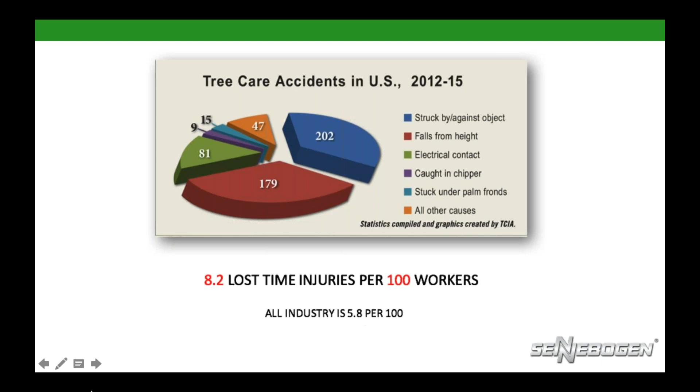I'd like to move along, and in the next slide you'll see that we also have a big problem in the tree care industry with fatalities.

It's hard to say what caused them to make that sort of decision, but there are so many variables in tree work. Every tree is at least a little bit different. You could even argue that every cut is a little bit different. And that means the variables are around us all day, every day. We've got to be able to think on our feet all day. The opportunity for operator error is just all around us all the time. And now we're in a time of more distractions, perhaps, than ever before.

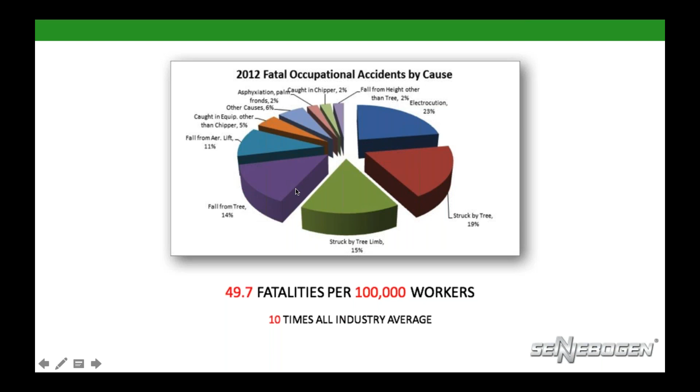This tool that we know of as the chainsaw has been both a blessing and a curse. The top handle saw in particular, because it positions both hands over the center of mass for ergonomic reasons, it also puts the operator into a constant temptation to work with one hand. Why? Because you can. It was never intended to be a one-handed operation, but because you can, that can free up the other hand to hold the branch. And this is unfortunately for several decades now, the way people have been, I'm not going to use the word trained, they've been shown how to do tree work. The longer they do this, the more they do it, the more they're training themselves to work this way. And this is the result.

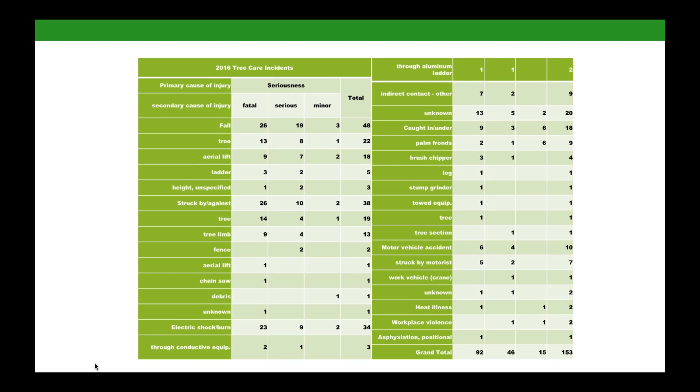But I believe we need a new approach. If we're really going to reduce injuries and reduce fatalities, we need a game changer. And the game changer that's before us right now, and the future is here. Just like in the forestry industry, the traditional forest and logging industry, automation and technical machinery was developed to harvest trees by people working in a much safer environment, eliminating fall hazards, eliminating struck-by hazards, putting people, for many intents and purposes, into a Faraday cage, removing them from that danger. That is what has made a difference in that industry.

The future is now. It's here. I'm excited about this technology because I want to make a difference in the dismal injury and fatality rate in the industry that I know and love so much.

Thanks a lot, Ken. I would like to take the opportunity to introduce to you the SENNEBOGEN 718, as well as go through a couple of details and use a lot of pictures to show you what we did and what were the basis of our design and the ideas behind our design.

As we get into this area, the 718 was engineered based on over 65 years of experience that SENNEBOGEN has building material handlers and cranes. And we combined that experience with a very deep analysis of the tree care industry requirements and how we could make changes to this industry.

First of all, we look into safety. We look into trying to remove the person from the cutting area on the trees as much as we can, in as many situations as we can, and position this person inside a protected environment inside the operator's cab.

The second criteria was performance. It's well known to all of us today that it's getting more and more difficult to find people to perform this work. So how could we mechanize this work and increase drastically the number of trees that can be processed per hour or per day using just one operator?

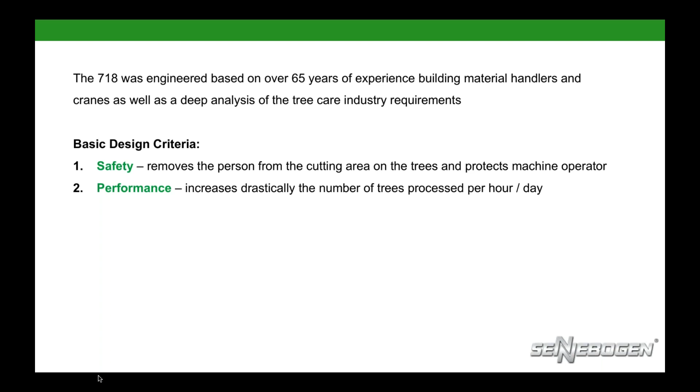As a third criteria, we look into operating costs. And we look into how can we build equipment that's very simple to maintain, that's very robust, that can reduce drastically the operating cost as well as the maintenance cost.

And last but not least, we look into flexibility. We know the industry and we know that most of the companies are not cutting trees every day, but they have other tasks that they have to perform. So our idea when designing the 718 was to provide a tool carrier that can operate multiple attachments, being a grapple saw, being a tree processor, being a mulcher, being a mower, without having to make any change to the base unit. Meaning just changing the attachment at the end of the stick, we could perform the different functions.

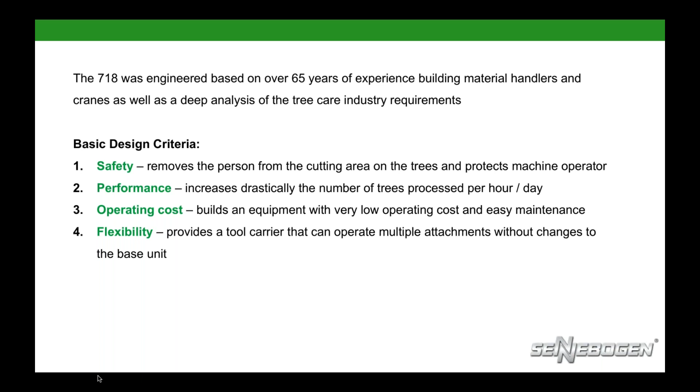Moving forward, I would like to get a little bit into the basic operating data without boring you with 1,000 numbers and figures. Everybody can read that in a catalog. But the important design criteria was, first of all, the lift capacity. When I cut the tree, I have to make sure that I can hold that tree and that I can bring that tree safely down. So the lift capacity at 45 feet height, that's the highest point we can reach today, is 12,000 pounds.

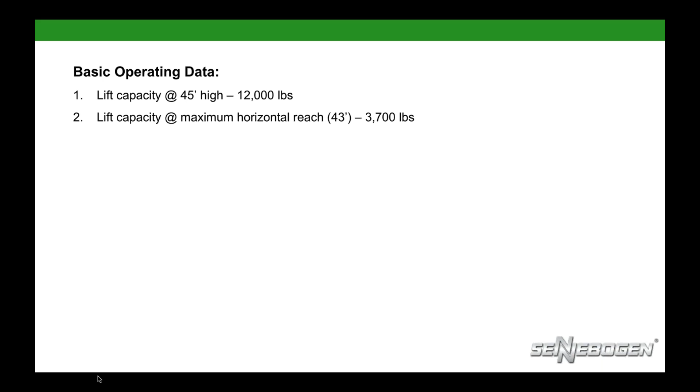Second, when we look at the lift capacity at the maximum horizontal reach, so if I have something that I have to reach that's far away, that's difficult, I can still at 43 feet of horizontal reach lift 3,700 pounds.

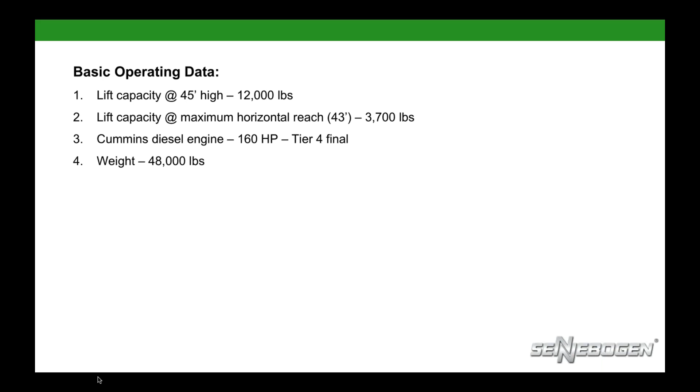When we look into the motorization of this unit, we decided to go with a Cummins engine, mainly because it's a very popular engine in North America. It's very easy to get replacement parts. It's very easy to find service. It's a 160 horsepower diesel engine, Tier 4 final technology, the newest level of EPA requirements when it gets to pollution on the engine. The weight of the unit is 48,000 pounds, and coupled with a transport width of only 8 feet and 7 inches, makes it very easy to transport from site to site.

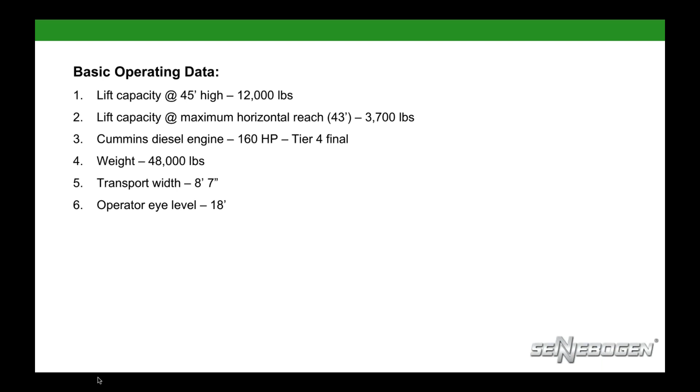We install in this unit an elevating cab that brings the eye level of the operator to 18 feet. And at the same time, this unit tilts, what allows the operator to be in the ideal operating position, seeing exactly what he is doing. And as we all know, when you see better, you can operate in a much safer way.

We install in the unit a dual pump system. The idea behind is that we have one pump that is dedicated to the attachment only. So when I'm using a mulcher, it's an attachment that requires a lot of oil at high pressure. I can still be driving and using that mulcher because I have independent pumps. So the oil I'm taking to drive the unit is not coming away from the attachment, meaning the attachment can operate at maximum performance all the time.

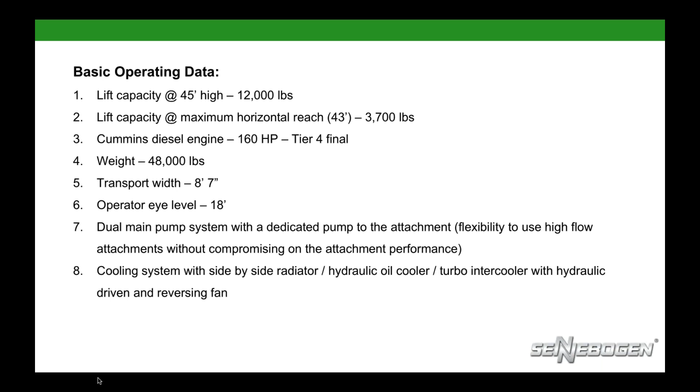And last but not least, we design a cooling system that has the radiator, the hydraulic oil cooler, and the turbo intercooler side by side, meaning that there is no contamination in between that causes overheating of the unit or difficulties in cooling the unit. And this combination of the three coolers is refrigerated by a hydraulic driven fan, and this fan is reversible. That means whenever any one of those three fluids is increasing in temperature, the fan will turn in the opposite direction and will clean the radiators, making sure that the machine operates in ideal operating conditions.

As we move forward, I would like to show you a couple of details on the unit. As you can see on this picture, that's almost at maximum horizontal reach at 43 feet, where we can still lift 3,700 pounds. We can work far away from the trees in difficult to achieve conditions.

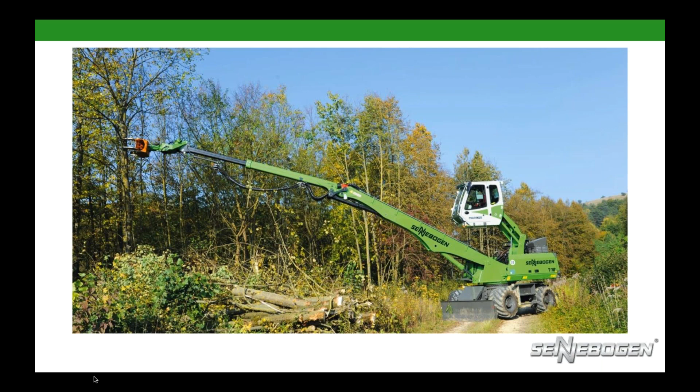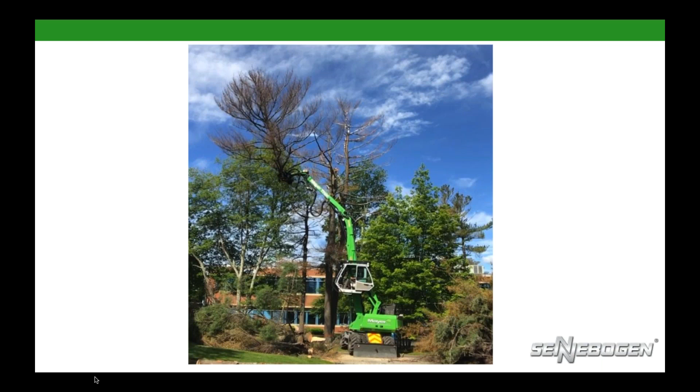Moving on, we'll see operating at the highest level, where we can lift 12,000 pounds and bring that big section of tree safely down, making sure that there's no collateral damage when that piece of tree or that tree falls down on the buildings or on anything else.

As we can see on the next picture, I would like to give you a brief overview on the machine and its components. If you look to the front of the unit, you see some steps. The purpose of those is to give 3 points of contact when the mechanic is going on top of the upper carriage to do any kind of maintenance. And the only reason to go to the top of the upper carriage will be to change hydraulic oil filters, what's done every 2,000 hours, so it's not a daily or weekly maintenance.

And as you can see, there are railings around the upper carriage. So when the mechanic is up there, there is no danger that he will fall down. So we have to make sure that we produce equipment to the highest possible safety levels.

If you look to the cabin, you'll see that cabin is tilted at 30 degrees, placing the operator in an ideal operating condition. And on that right side where you see that cover, that door, behind that door, you find the engine as well as the cooling package.

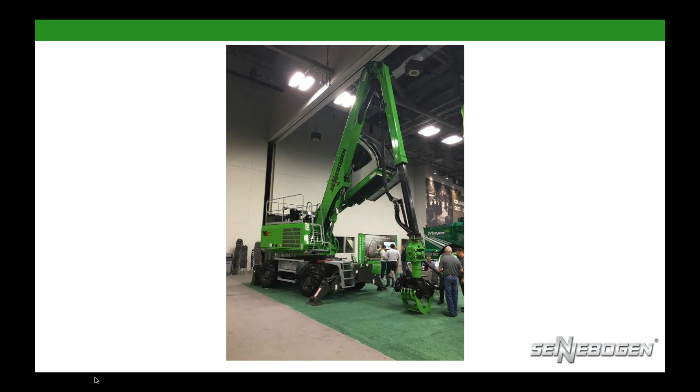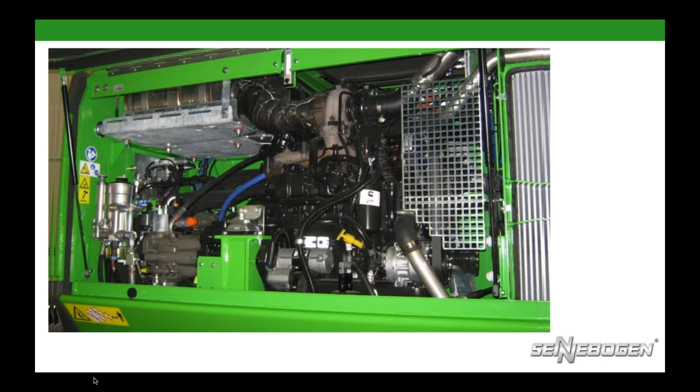As we move to the next slide, I will show you a detailed view of the engine mounted on the side of the unit. You can easily find the alternator, the starter, the turbo, the filters. So you can do all your maintenance from the ground and in a very easy and accessible way. And when you look to the right side of that picture, you see the coolers.

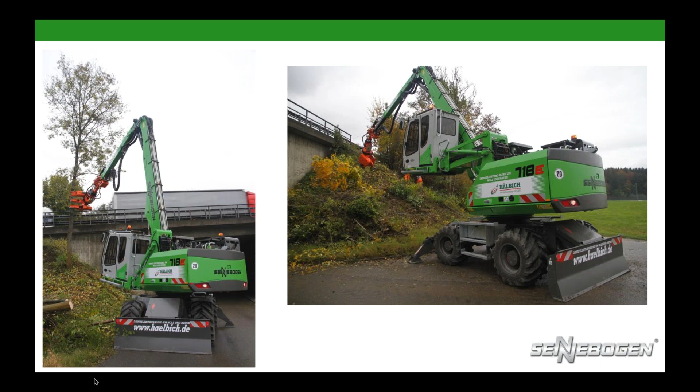As we move forward, I want to show you the cab in the highest position, still horizontal, not tilted. This would bring the operator eye level to 18 feet. You can see again here the outriggers in the front, the blade in the back, as well as the railings all around the upper carriage for protection of the operator.

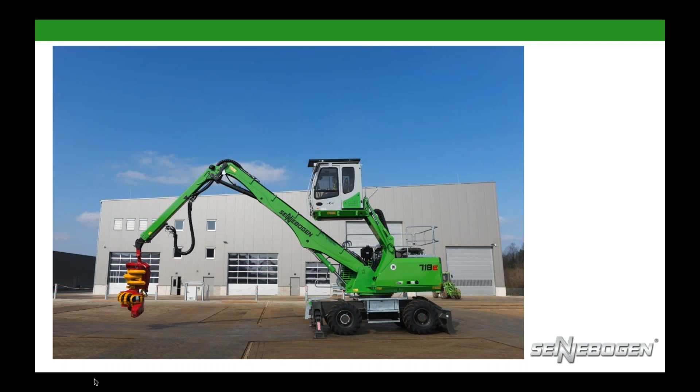Under the cover on the left-hand side, which you can see in this picture as well, are the electric panel, the control valves, as well as the central lubrication system. The complete unit is continuously being lubricated, and the controls are all hydraulic. That means there are no electronics. It's all hydraulic over hydraulic, which makes troubleshooting and maintenance extremely simple.

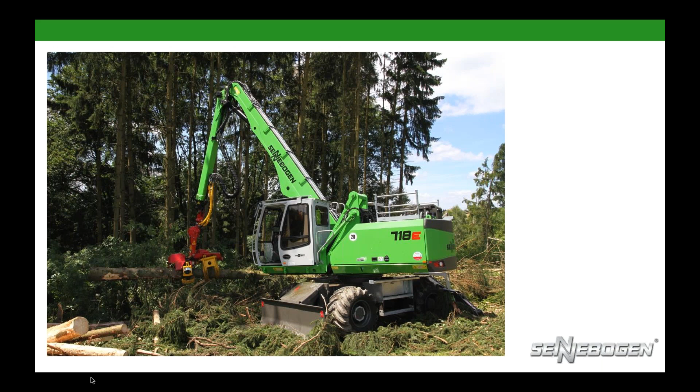Another detail that can be seen in this picture is on the cab, we have a sliding door. That means when the machine tilts back to the original position, the operator can easily access the 3 points of contact through the steps between the front wheels and the rear wheels, and from there get onto the cab. Again, safety first as the first design criteria on the unit.

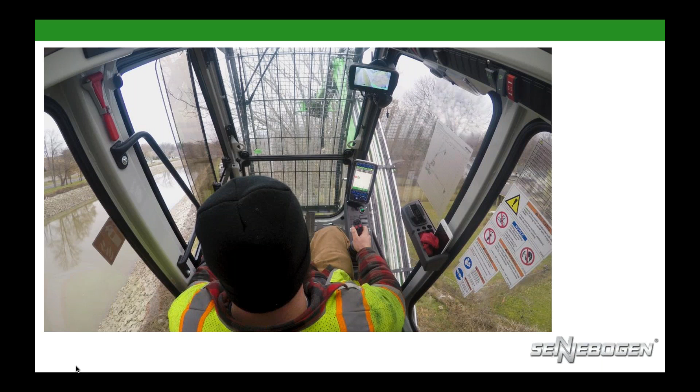As we move forward, I'd like to show you the cab in the maximum tilted position as well as in the highest point. You can see that's very comfortable. You can be looking up at 45 feet where we'll be cutting that tree and be sitting in the cab in a very, very comfortable position.

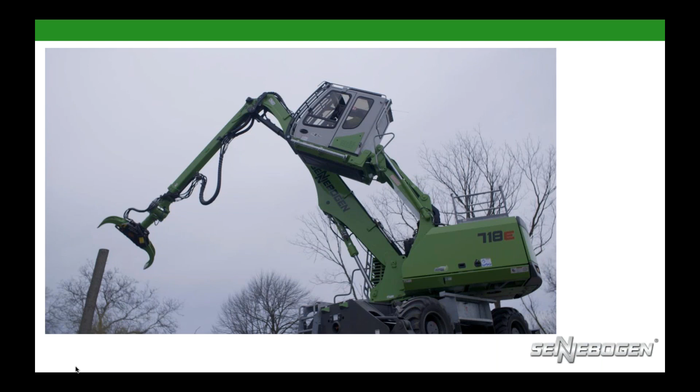I would like to draw your attention here as well to the connecting link between the end of the stick and the grapple, and I'll talk more about that in a second. As we move forward, we'll see the details of that connecting link.

Because we never know exactly where we'll be able to position the machine, and for sure the branches and the trees are at the most different angles when it gets to the position of the machine on the ground, this way we can tilt and rotate that grapple, simulating the function of the human hand and wrist, so that we can always grab that branch or that tree safely, so that when the cut is made it will not slide down or fall down.

As well, you can see here on the lower part of the grapple the saw element that, once activated, cuts the tree or cuts the branch.

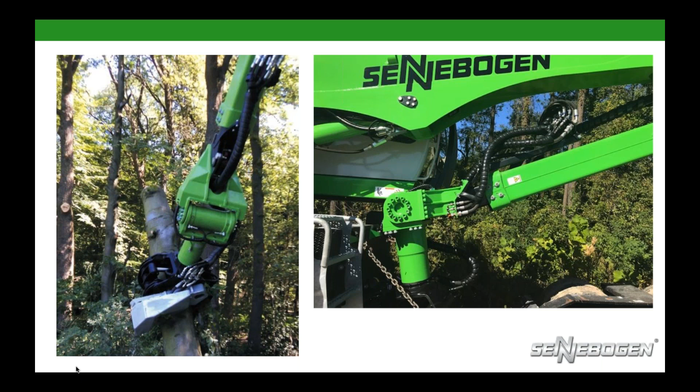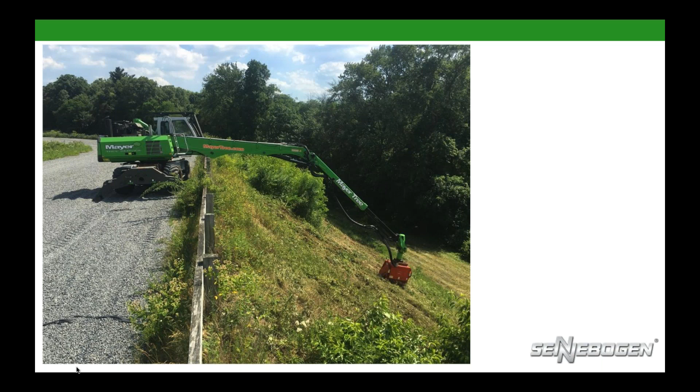Moving forward, we'll see again a similar mulcher operating at a higher position with the telescoping stick extended. It extends 9 feet, which gives a tremendous reach out.

Another interesting aspect, opposite to cranes, this machine does not need to be leveled to operate. You can easily see from the position of the outriggers that one is much lower than the other, the machine is at a certain incline. So the machine is designed to operate off-road, in non-leveled terrain, which increases flexibility and facilitates operation because you can just get to the tree, put your outriggers down and cut. You don't have to spend time trying to level or position perfectly.

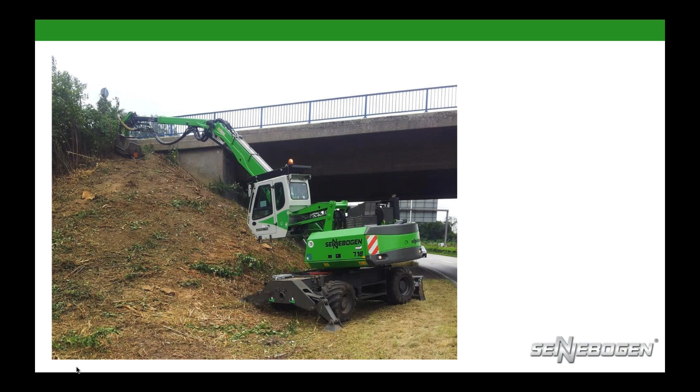Moving on, I would like to talk a little bit about pricing analysis and some financial options.

First of all, performance. Experience has shown, and we have a number of machines operating in North America, these are statements made by one of the owners of these machines. He's performing work 10 times faster than a conventional crew, with 25% of the people.

So that's the first step into looking at how to amortize the cost of the unit, how to finance the unit: the amount of work that can be done. Apart from the fact that you are doing it in a very safe way, and won't be concerned about accidents—we all know the cost of an accident today—you'll also be using far fewer people, which is another important aspect, since finding workers today in this industry is not an easy task.

My question to you is, how much can you pay per working day to use this machine instead of your conventional crews? I'd like to pause here and think about the cost per day that this machine will cover when operating. Is it $300, or moving forward, is it $500?

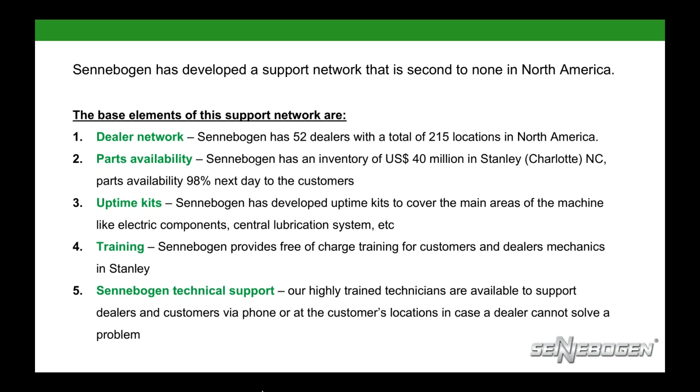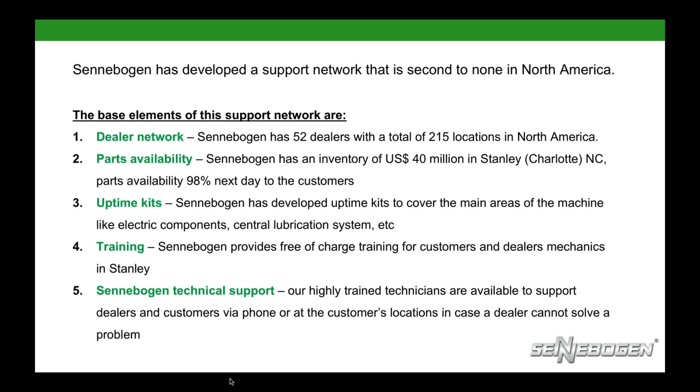Last but not least, our own technical support. We have a group of highly trained technicians available to support the dealers and the customers, either via phone or at the customer's location, in case a dealer cannot solve a problem. This is a support network that has brought us, within 4 years of being in North America, to be the market leader in material handling, and we never gave that position up. And we are fighting against established companies that have been in this country for 30, 40, or 50 years.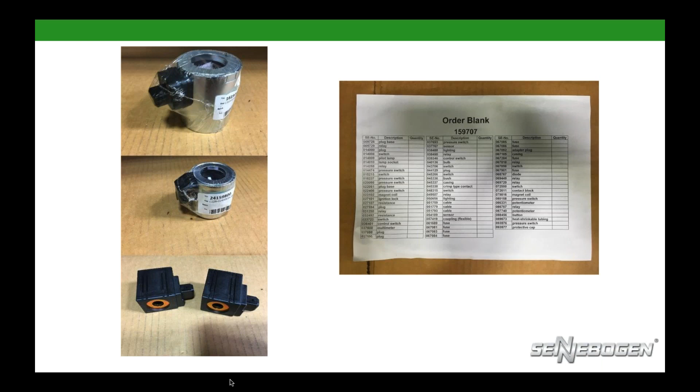As we move on, we'll see some more components on these kits - these are the coils for the solenoid valves. And inside that box, there is an order form as well, so once the mechanic uses one part, he can order that part only and replace his kit.

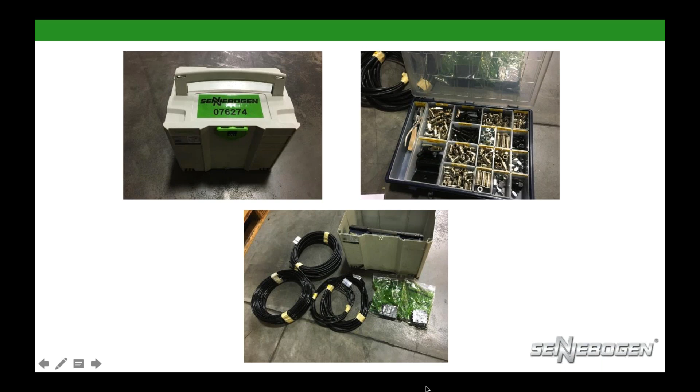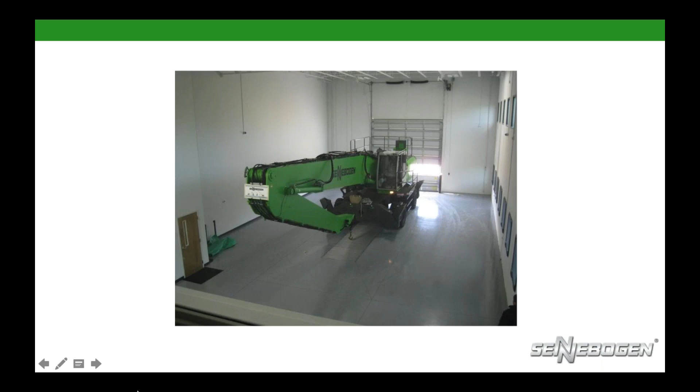With the possibility of accessing the unit from the sides, from the top, and from the bottom, the mechanic will really learn what has to be done as preventive maintenance or repairs, to be prepared to take care of the units on the field.

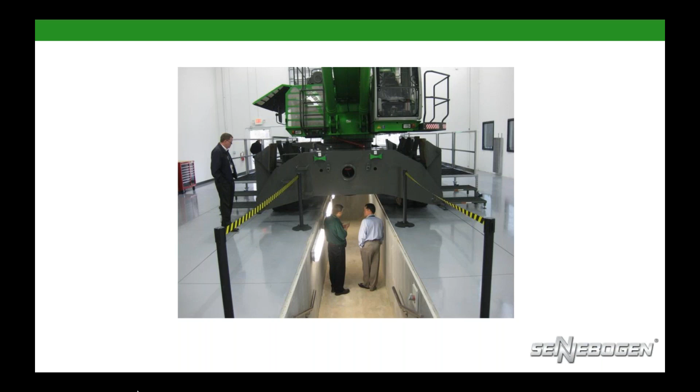Each training is 5 days, level 1 and level 2. Once a mechanic goes through both levels, he is 100% certified to do any kind of repairs and troubleshooting, making sure the unit is working under 100% operating conditions.

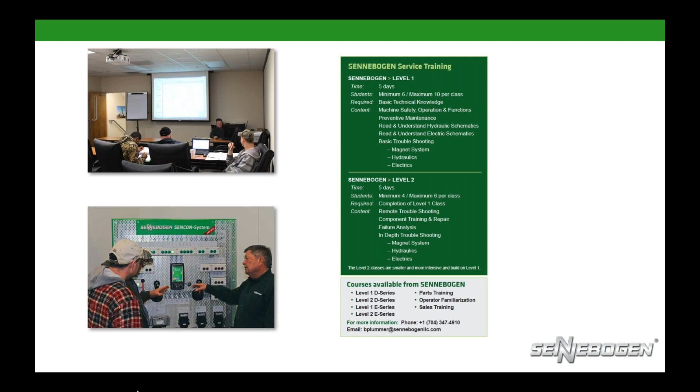You can see on the left bottom picture some details of some of the simulators we use to train the mechanics, where we can build in faults and codes so that they can troubleshoot and find where the problems are. As we move on, I want to talk a little bit about our April demo day.

Our April demo day will be on April 4th and April 5th. We are planning the following activities. First of all, we'll have machines here where we can do walkarounds and look in detail at what I've very shortly shown you in this presentation today, live on a machine where all the components are.

How to do the maintenance, how to access the components. Second, we'll do a detailed presentation on the design criteria, on the features and benefits, why we designed this machine the way we did, and where the benefits are for the tree care industry.

Third, we'll do, of course, a live demonstration. We have enough space here that we can go in and cut some trees in different conditions and allow you to see what the machine can do.

Fourth, we'll do a very detailed presentation, not only on cost of the machine itself, but operating costs and finance options. We'll have people from our financing company here to answer detailed questions, as well as a visit to our operations center here in Stanley, including the spare parts facility and the training center. And of course, we'll have drinks and lunch to take care of everybody.

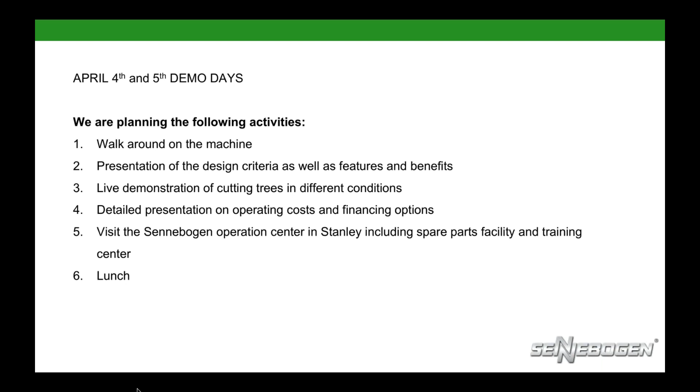Thank you very much for your participation, and I hope to see you all here beginning of April.